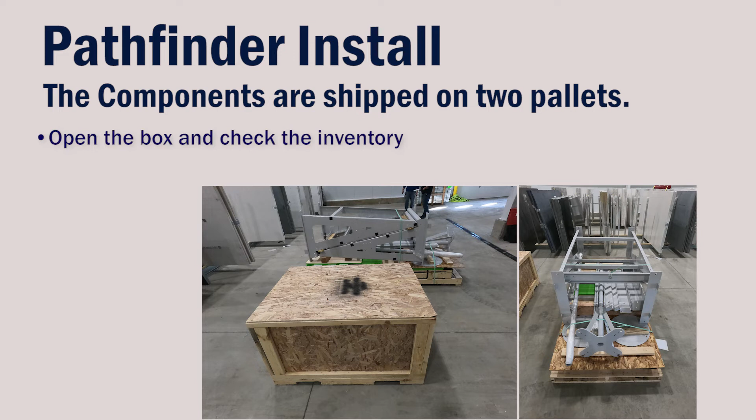You'll find all the components of the Pathfinder shipped on two pallets. Start by opening the box and checking the inventory. Find the package with all the nuts and bolts.

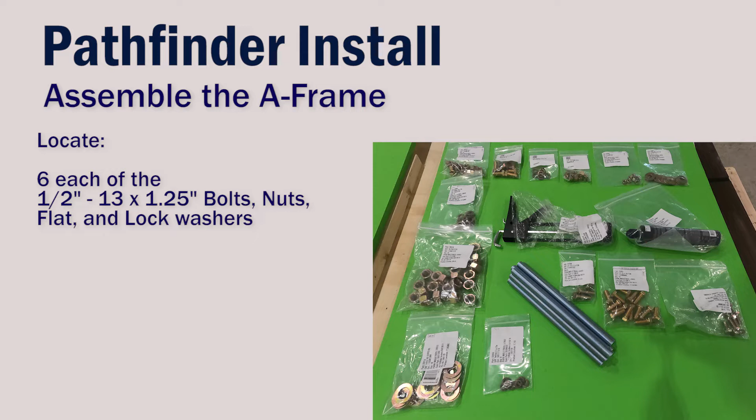We'll need 6 each of the half-inch by 1-1/4 inch long bolt setups to assemble the A-frame. Next, we'll unstrap and remove the left and right side of the A-frame and set them roughly into position.

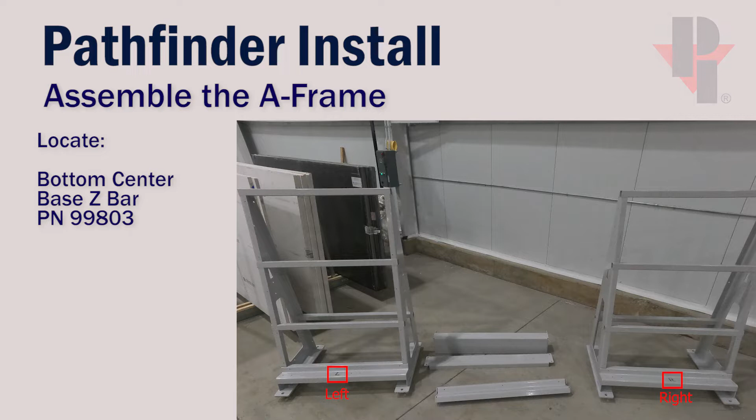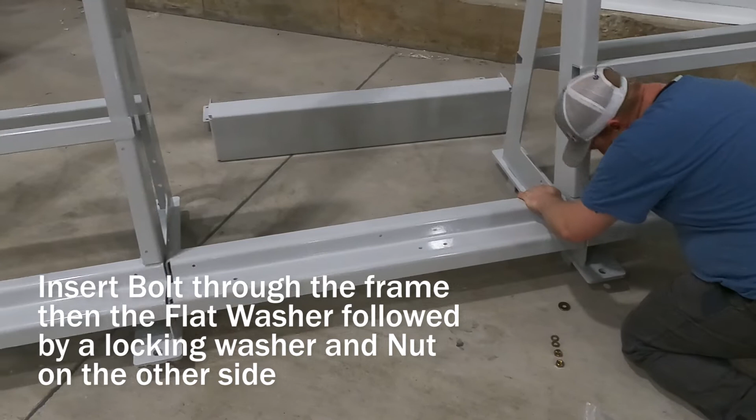We'll start our assembly by attaching the left and right to the bottom center base Z-bar using the 6 half-inch bolt setups that we located earlier. Slide the bolt through the frame components and then a flat washer, a locking washer, and a nut. Do not tighten at this time.

Next, we'll add the back spacer plate, and we'll need 4 bolt setups. No flat washers this time. And do not tighten these yet either.

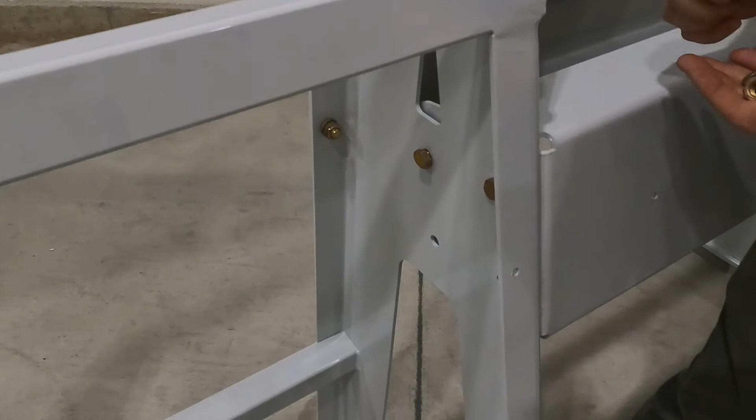Finally, the last part of the frame is the front spacer plate. This will require 4 bolt setups, including the flat washers. Note that there is an extra hole in the front, used for alignment. A screwdriver can be placed through the holes to assist in assembly.

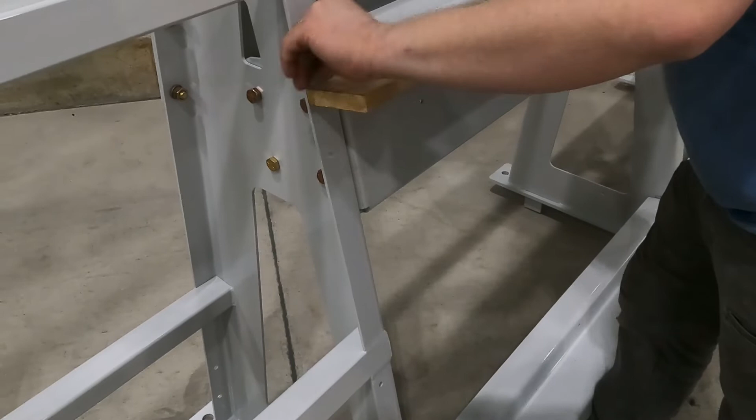With all 8 bolts in place and snug, find a straight edge long enough and adjust the front plate so that each end is flush with the edge of the Pathfinder's frame. Now you can tighten up all 4 bolts at each end of the plate, making sure it doesn't move from its flush position. Also tighten the bottom Z-bar and back center bolts as well.

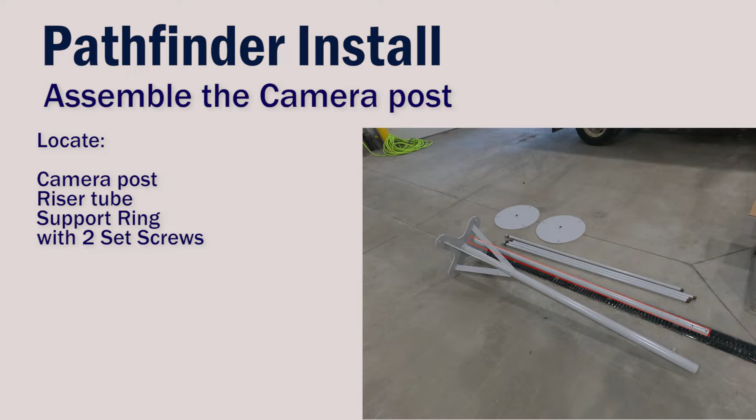Next, we'll assemble the camera post. Slide the riser tube into the camera post so that the 2 bolt holes are out. Then slide the support ring onto the riser tube, slide it down a couple feet, and lock it into position by tightening the set screws.

Next, we'll need all the components and bolt sets to assemble the camera mount. The swivel assembly is made up of the turnbuckle, an eye bolt, a nut, and a washer. Pre-assemble this first, as shown.

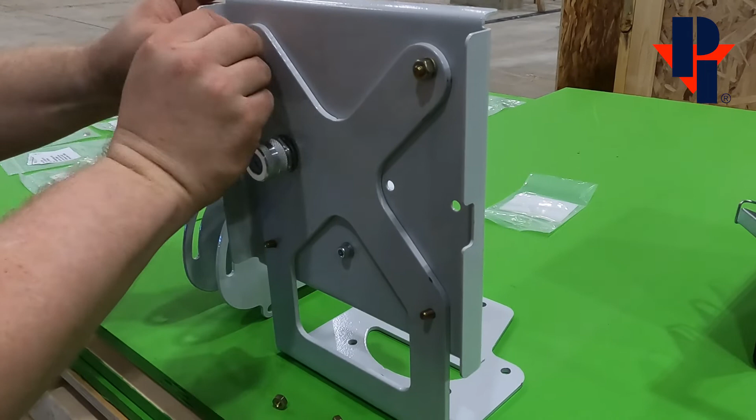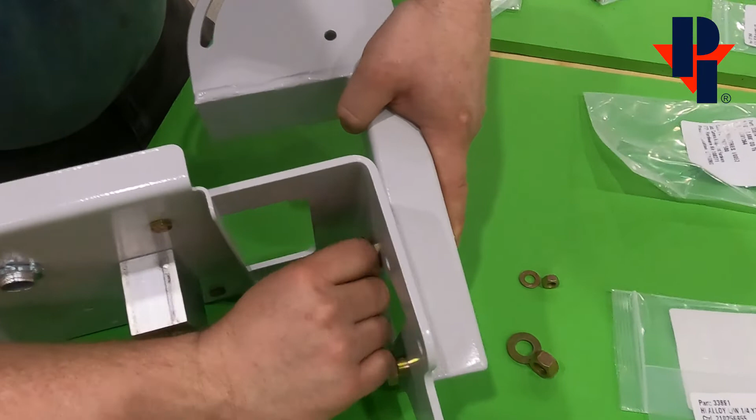Then assemble the housing. Start by attaching the enclosure bracket to the enclosure base plate using 4 quarter-20 bolt sets. Then attach the swivel to the enclosure bracket using a half-inch and 5/16 bolt sets.

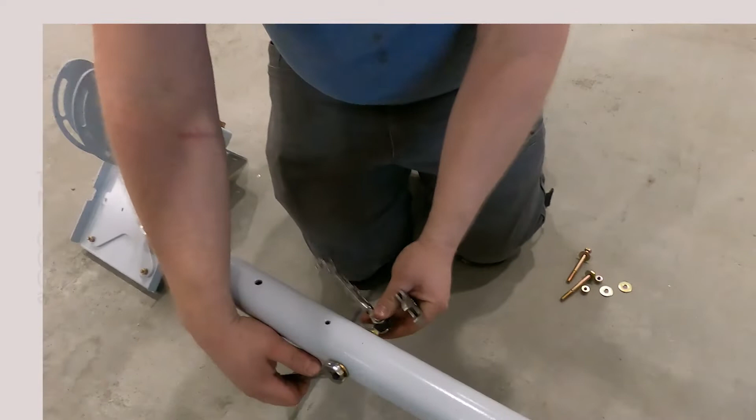Now attach the camera mount to the camera post. Start by bolting the turnbuckle to the camera post, and when it's finally tightened, make sure the turnbuckle is in line with the post.

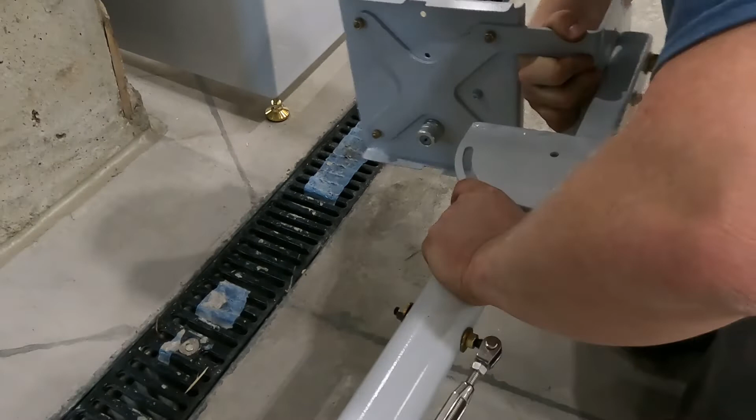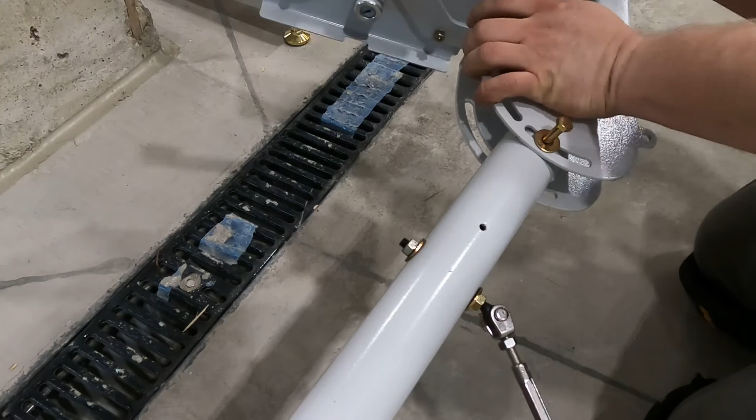Now you can attach the camera mount to the post. Slide the swivel assembly over the post. Then align the holes and insert the 5/16 bolts with a flat washer on the bolt head side. You will also need another flat washer and a locking nut for the other side of the pivot assembly.

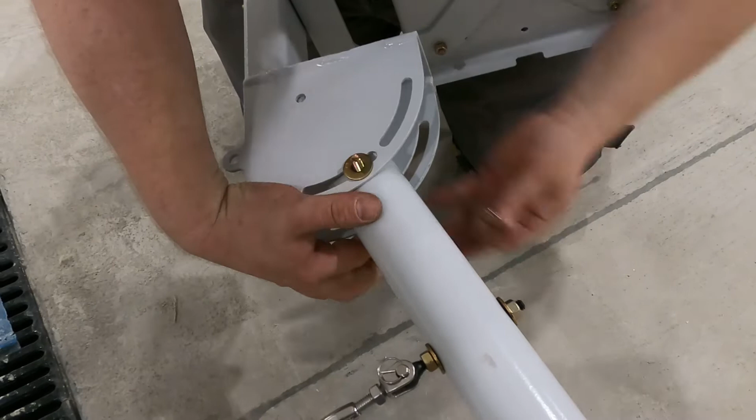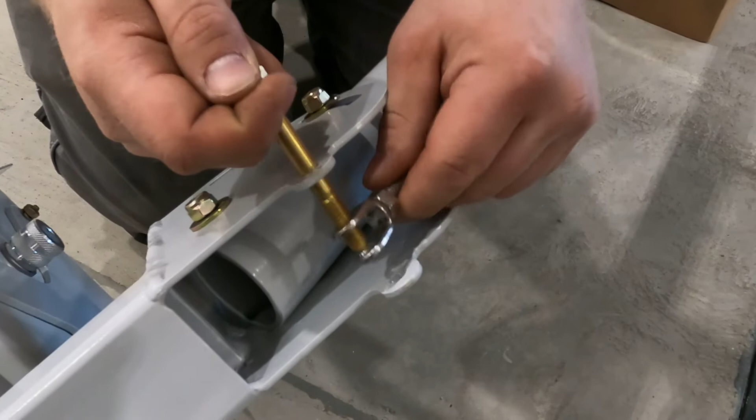Just slightly snug these bolts for now. Remove the standard pin from the turnbuckle and insert a 3-inch long 5/16 bolt through the pivot assembly and the turnbuckle, and you can tighten this bolt down.

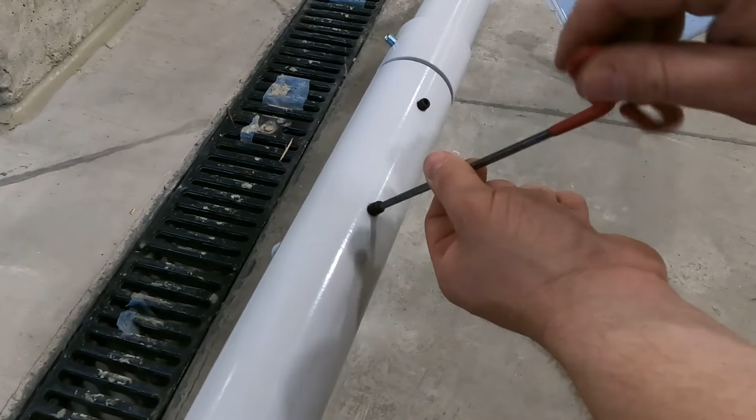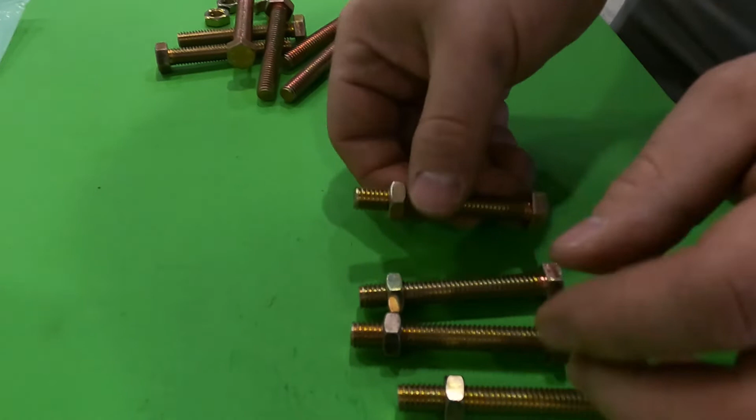Insert the 2 set screws into the camera post and just snug them for now. It's best to pre-assemble the 3/8 leveling bolts. You will need 10 total: 6 for the light posts and 4 for the camera post.

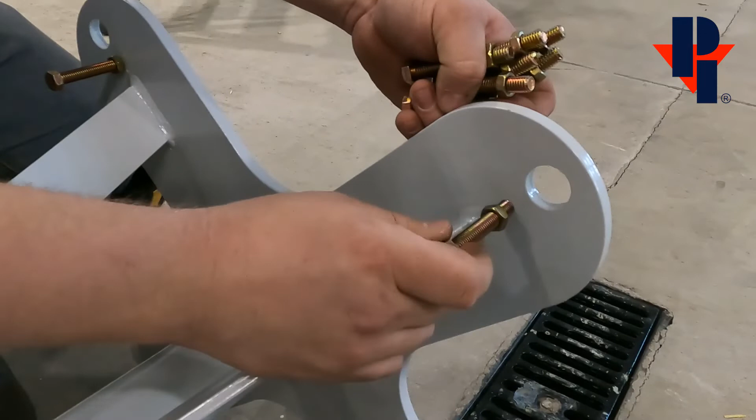Thread the leveling bolts into both the light posts and the camera post. Then tilt the camera post up and level it into position both ways.

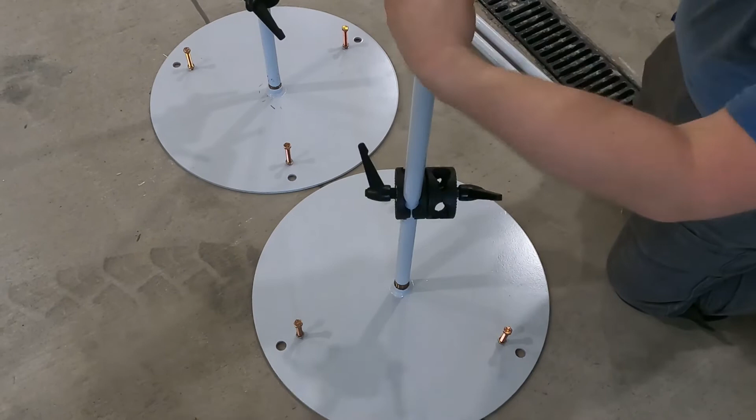Now assemble the light posts. Start by sliding the light clamps over the lower post. Then thread the post into the light post stand and tighten it up.

And then do the same with the top posts. Slide on the clamp and then thread the top post onto the lower post and tighten.

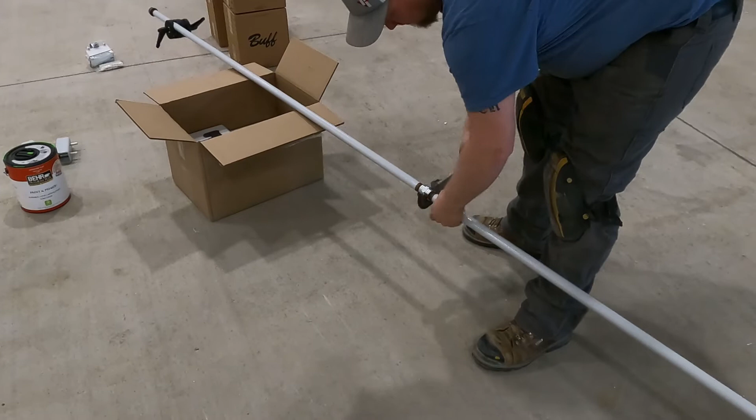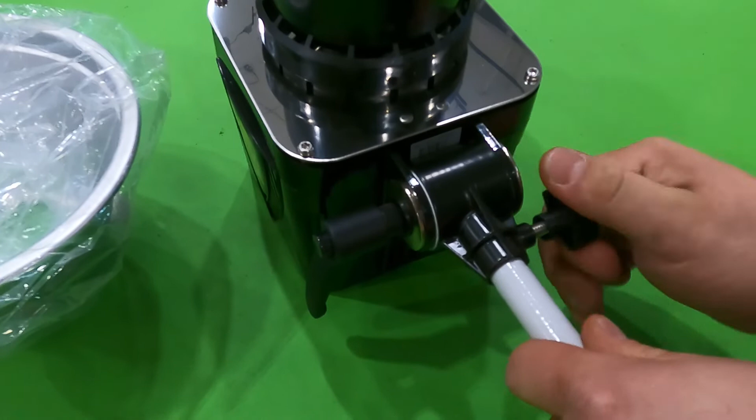Next, we'll assemble the lights to the post. Start by inserting the mounting pins into the flash and aligning the dimple with the bolt.

Then remove the protective cover from the lamp by squeezing the clamp. Remove all the packaging, being very careful not to touch the bulb. Then insert the reflector onto the lamp assembly by squeezing the clamp.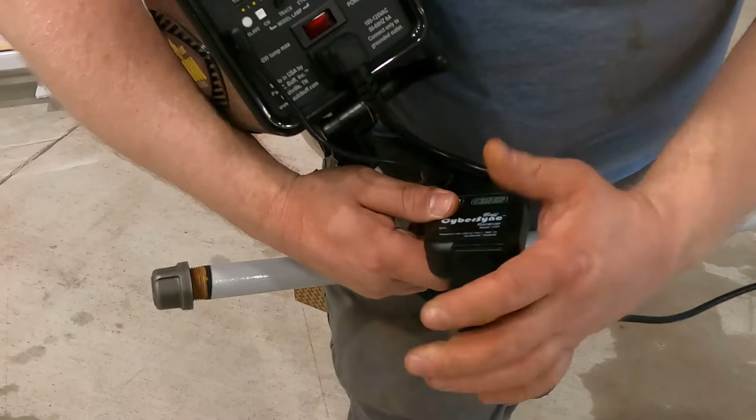Attach a flash assembly to the top of each of the posts. One of them will need the flash receiver plugged in line with the power cord and the provided sync cord connected as well.

Take note of or adjust the frequency setting. This must be the same as what's set on the transmitter of the camera.

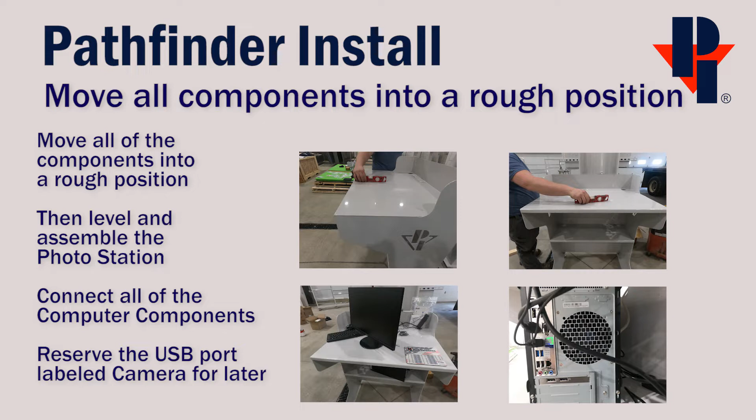Now move all of the components into a rough position. Then we can level and hook up the computer at the photo station. Be sure to keep the USB keys, the targets, and the calibration square in a safe location.

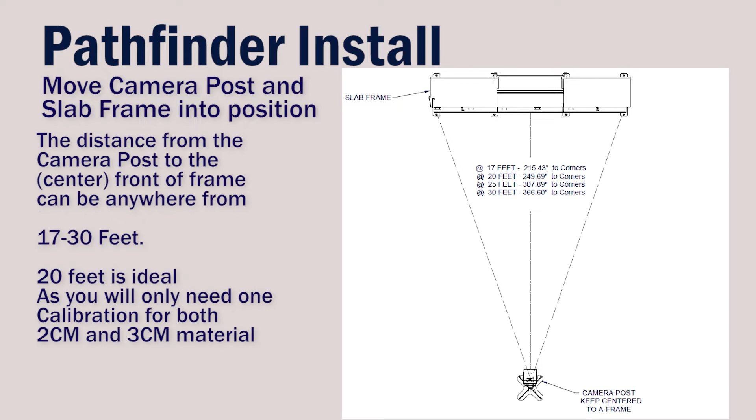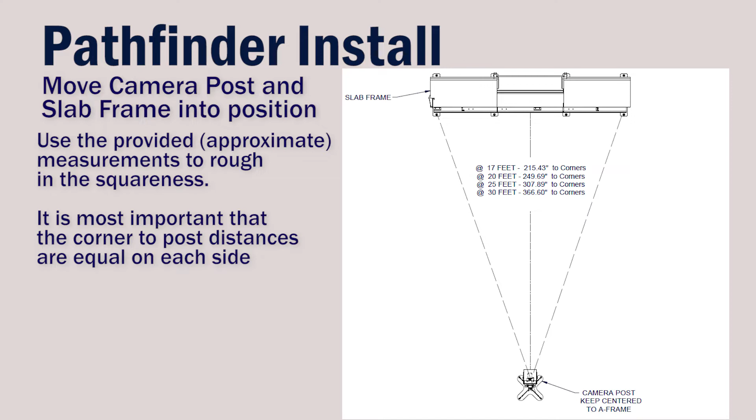Now get the camera post and the A-frame into its final position. The distance between the two can be anywhere from 17 to 30 feet. It is important to get the A-frame centered and squared to the camera post. Make sure the distance from the right and left corner back to the post is equal on both sides.

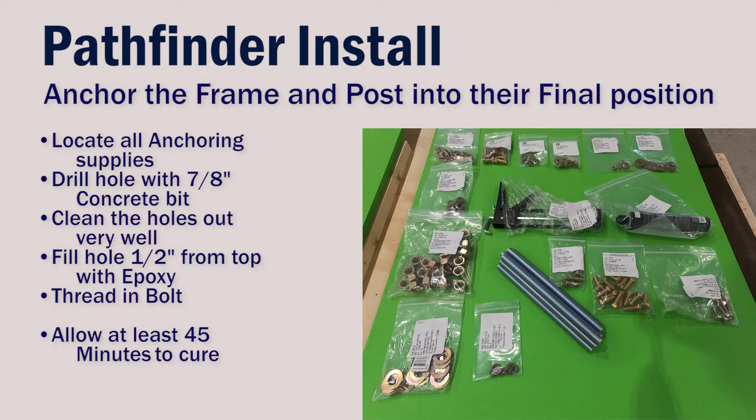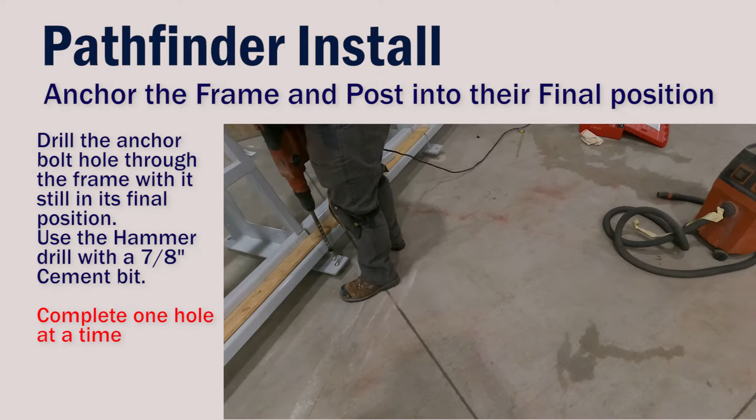And now we'll anchor the post and frame into its final position. Start by locating all of the anchoring supplies. Drill the holes into the concrete through the frame so it does not move. Drill the holes about 3.5 to 4 inches deep, but not through the concrete.

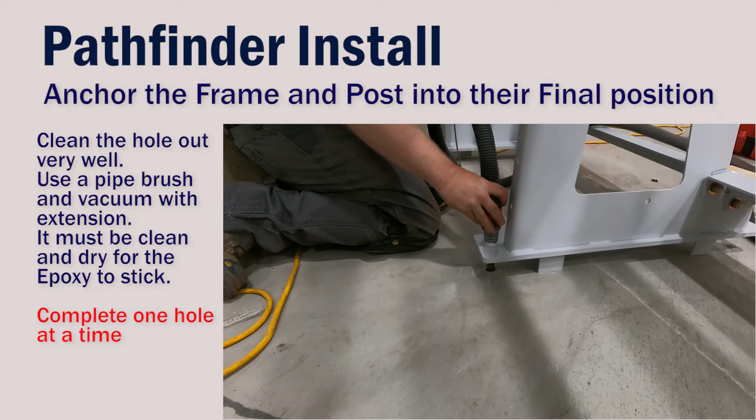Clean the hole out very well. Use a pipe brush and a vacuum with an extension. This extension being used is actually the handle to a bottle jack.

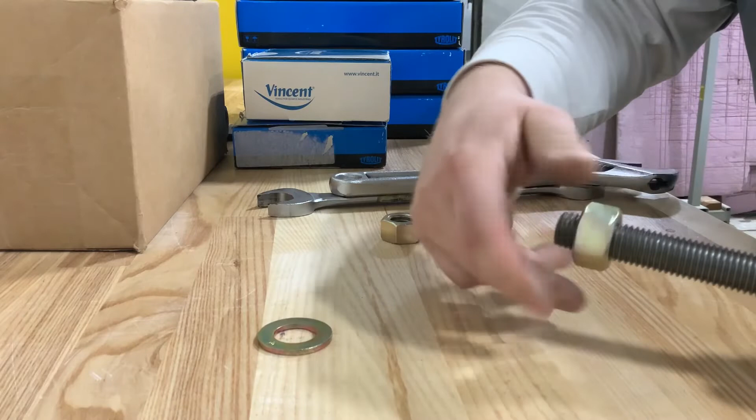Pre-assemble the threaded rods by placing 2 jam nuts at the top. This is our anchor bolt. Fill the hole with epoxy. Stay about a half inch from the top. There is already a washer and nut underneath the frame tab.

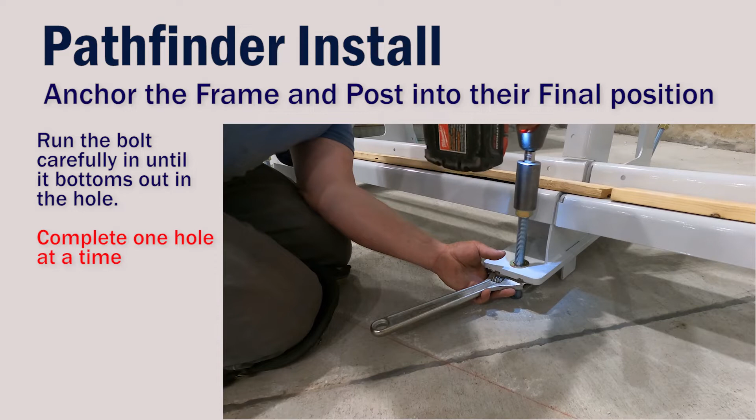Now, using a wrench, carefully support the bottom nut while you use an impact with a 1-1/8 inch socket to drive against the jam nut. Run it down slowly until it bottoms out in the hole. Then work the rest of the epoxy in around the bolt to seal it in better.

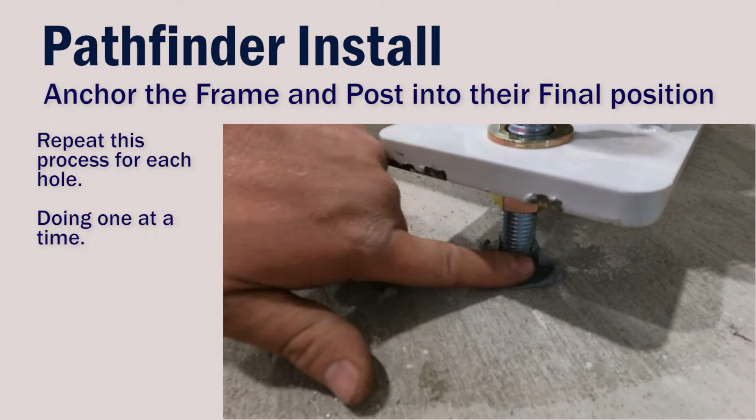Now, while the epoxy cures, we can go drill the holes and put in the anchor bolts on the camera post. Drill the hole and then tap in an anchor bolt with a flat washer and nut on the top. Then tighten the nut to secure the anchor bolt into position.

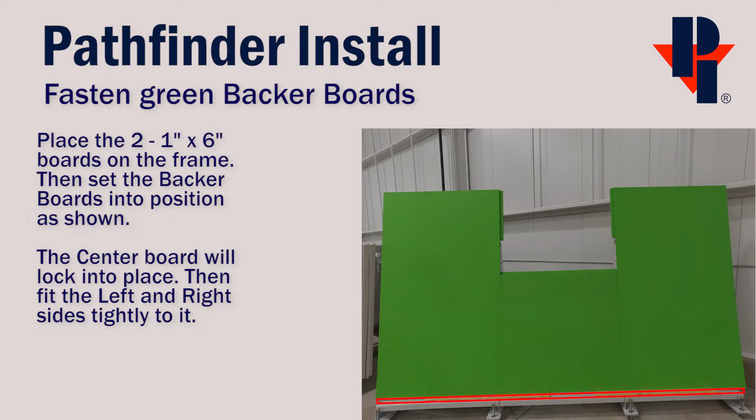Now let's go back to the frame and we'll mount the 3 green backer boards. Place them on the provided 1x6s so there will be a small gap between the boards and the bottom of the frame. Now you can fasten the backer boards to the frame from the back side. Use the longer Phillips screws for the upper center and the shorter for the flat steel into the plywood.

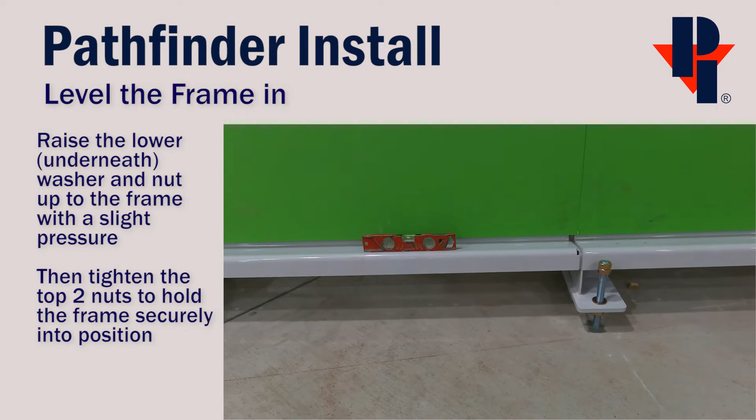Now level in the frame both front to back and left to right. Start by finding the lowest corner and raising it to the others. When the frame is level, adjust each one of the underneath nuts to apply a slight pressure to each frame mount. Then you can bring the top 2 nuts all the way down and tighten them to secure the frame into position.

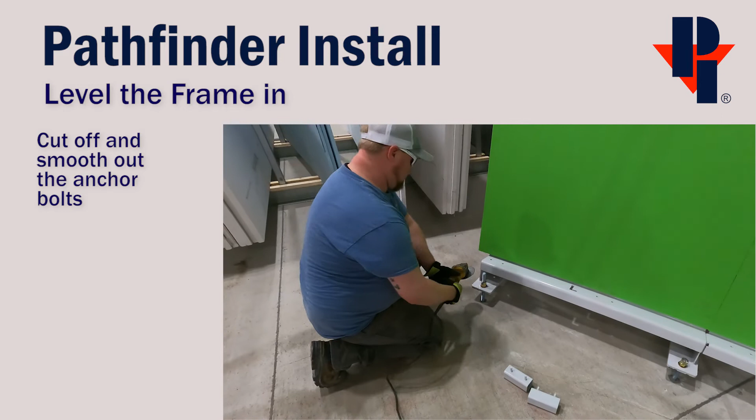Then you can cut off and smooth off the mounting bolts. And attach the target board brackets to complete the A-frame assembly.

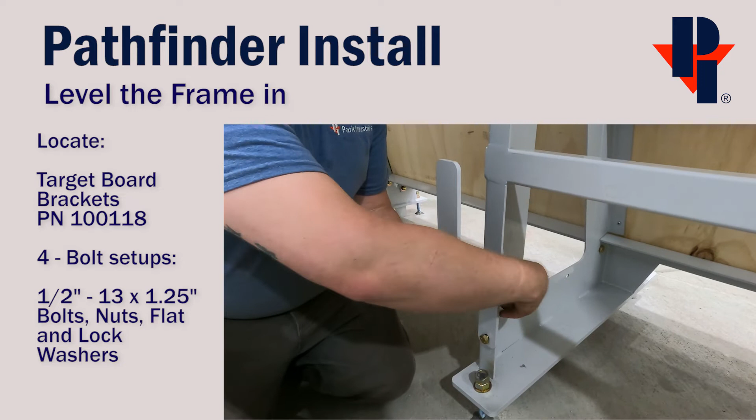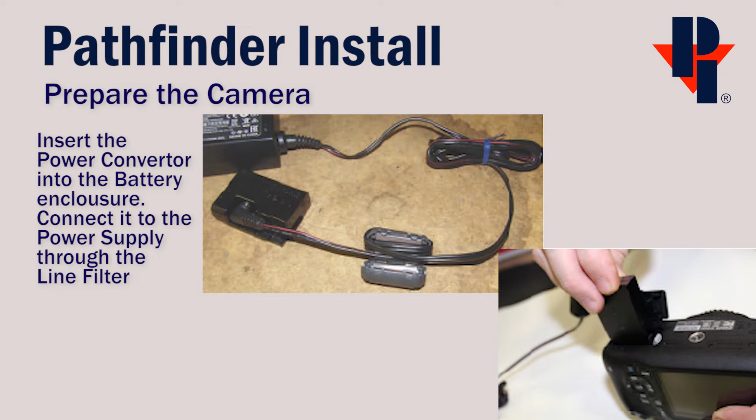Now prepare the camera for mounting. Start by hooking up the power supply. Remove the nut from the camera mounting block and thread the bolt snugly into the base of the camera to hold it firmly into position.

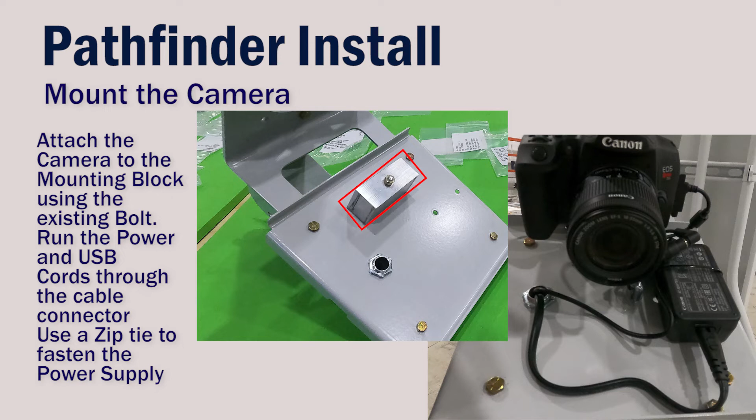Plug in the USB and run both cables through the cable connector. Attach the flash transmitter to the camera. Adjust the frequency to match the receiver. And you can press the test button to test out the connection.

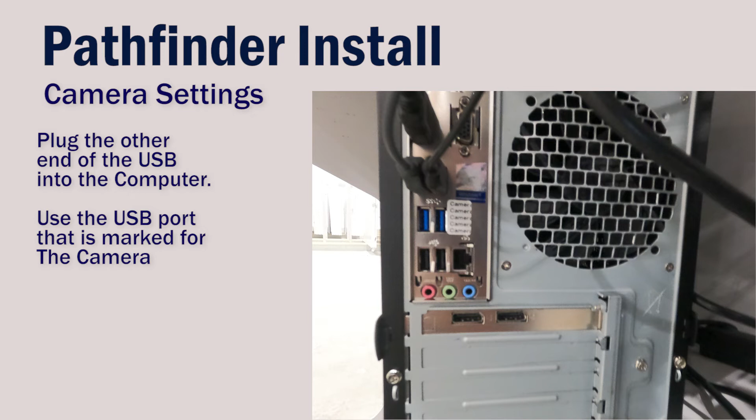Set the mode on the camera to M. Set the focus mode to AF. And turn the power on. Plug the other end of the USB using the labeled camera port. Plug in the camera's power supply and neatly zip tie all the cables to the camera post.

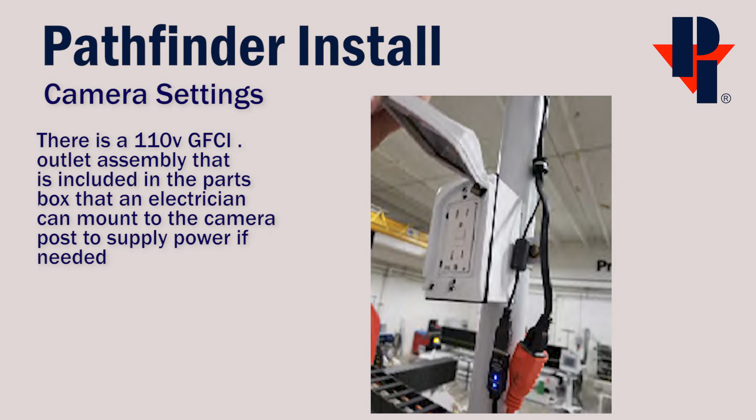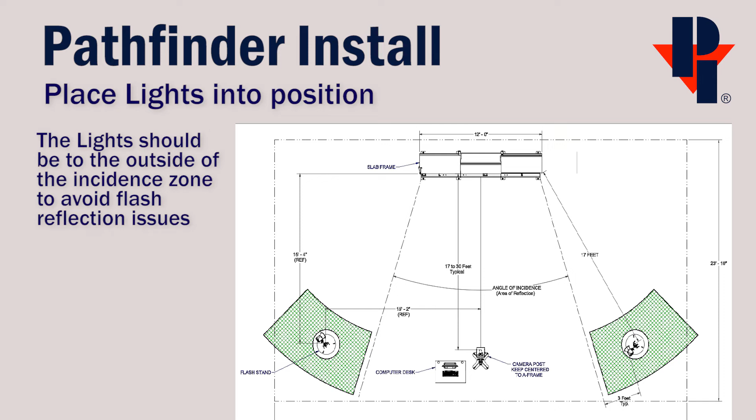Now we can place the lights into position. You can use the supplied drawing for dimensions, or it might be easier if you simplify things by using a rope, chalk line, or a hose like we did. Mark out the area using the main reference points provided in the drawing.

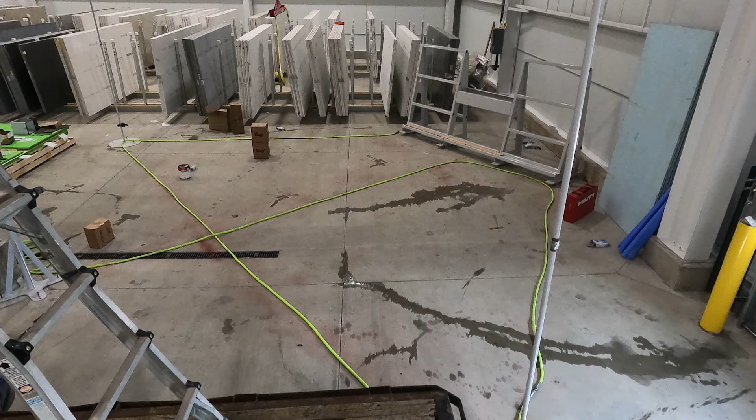Find a method and mark this area out on the floor. That will make it easier to see where the lights can be placed. In this drawing, the green area is ideal, the yellow is good, and there will be flash reflection issues anywhere in the red.

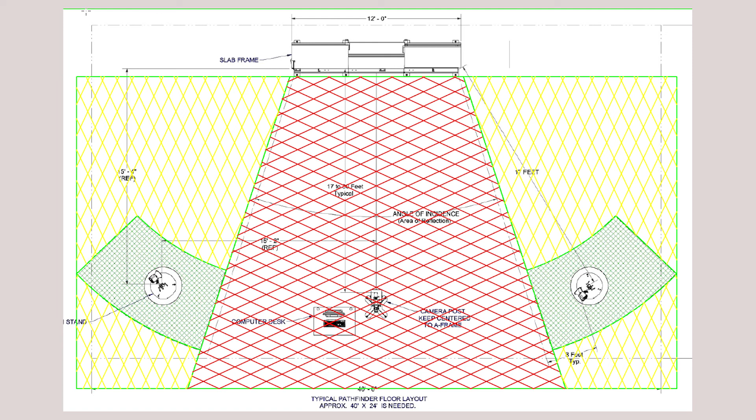So now you can place your lights into position, plug them all in, verify that they work using the test button on the camera's transmitter, and neatly zip tie all the cords into place. We will anchor these lights during the calibration process.

And now with your Pathfinder install complete, you can prepare for the calibration.